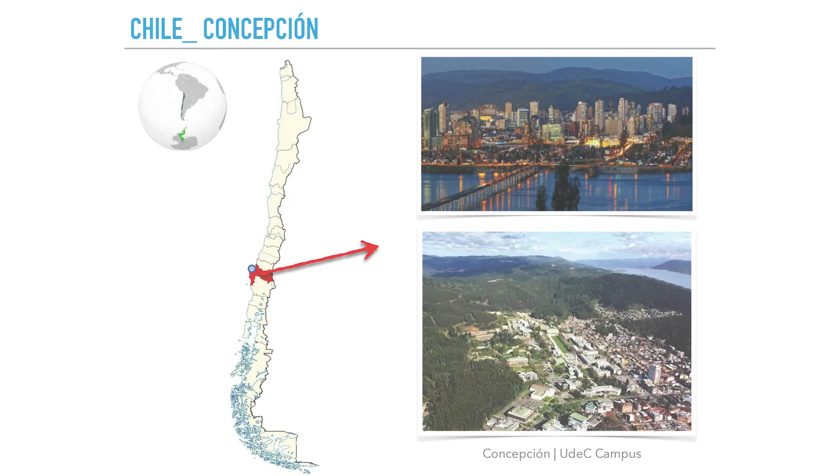And because of that, we are also basically a campus university. What you see here is our university, Universidad de Concepción, which is the only campus that is open to the public, like you would have here in the U.S. In Chile, that is not very common, and our university is actually part of the neighborhood of the city. All the people that live in the city feel part of this university. Some have studied there, some have not, but because it's an open campus, it becomes everyone's backyard, and it became a very popular place during the pandemic.

Just to tell you a little bit about my background, I studied in the same university where I'm teaching. I've been teaching there since 2010. But to give you a reference of how this has shaped me as a designer, we have what we call a faculty in Spanish, which would be like a college here. We integrate 3 different departments: architecture, urban planning or urbanism, and geography. And so we approach multiple scales of problems within the city.

And we try to integrate interdisciplinary collaboration with the geographers, who study not only spatial analysis but also social work, understanding how people interact in the built environment. And then we integrate the architectural component of building design together with urban planning. So this has very much informed my research approach and my design process, in terms of how we integrate all these multiple scales, which are very important if you're approaching sustainability. You cannot isolate a building from the rest of its context. You cannot isolate a city from the rest of its region, and so on. So it's a way of going in and out of these multiple scales.

And I think it's a good way for you to understand what I'm going to show you now with my students' work, just a few projects, so you can see the different approaches that we take. And there might be some similarities with your schoolwork as well. So one project that we did, integrated into a workshop that was part of an international conference, is this vertical studio we designed. We have students from different classes, from 3rd year all the way to 6th year.

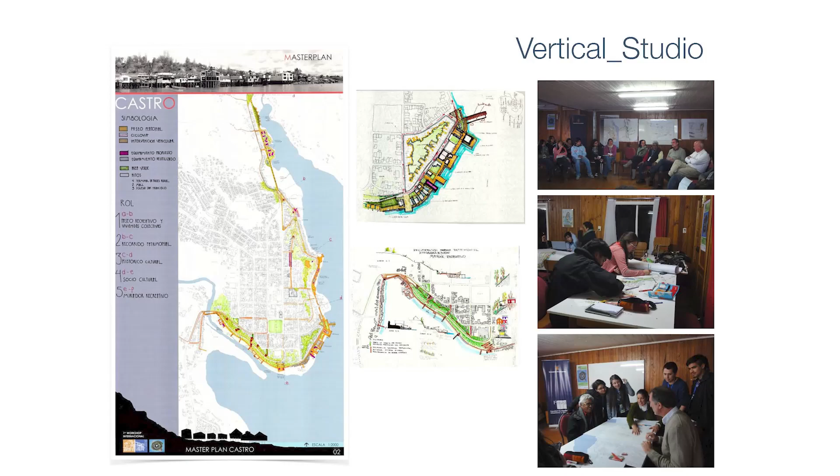And then at the end of the weekend, we developed a whole set of different strategies and site analysis, basically creating images of what different schemes can actually be developed in the future. So this information helped the local planners, the local people that work in the municipality, to inform future projects that they can fund and develop, that normally they don't have the time to do. So I think in that respect, there's a lot of work that our studios address in terms of problem solving for local communities on real problems. So a lot of the input that we develop is on that.

And at the end of that weekend, our students took that information and developed their own individual projects, which is what you see here. So some of them decided to do different centers for arts, some decided on lodging, or different types of programs that they integrated. And then at the end of the studio, they were able to go from a very, very big scale of urban planning, to a small urban design, all the way to an individual project. So they got to see the whole scope and the integration of these multiple scales, which I find very interesting. A lot of times, depending on the studio, you don't get to see that whole range of scales.

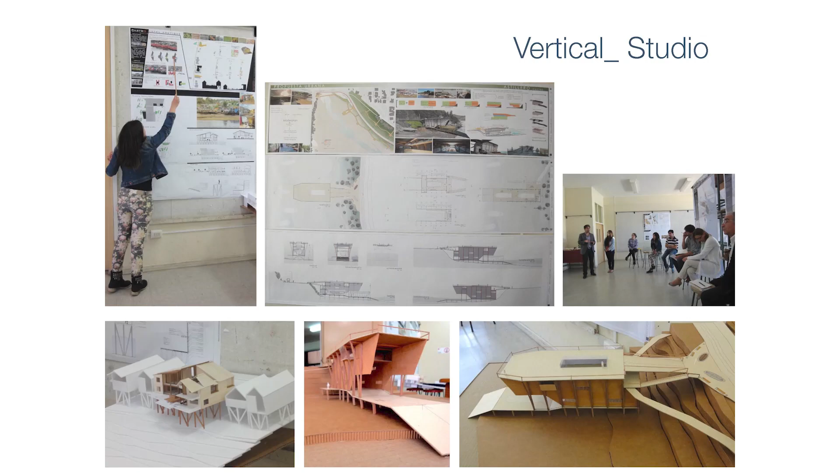Another project that I collaborated and participated in is a solar cluster competition, which was sort of like a design build like you have here. It's a project that was unique in its form. It was the first time that we actually did a national competition across multiple schools of architecture. And it was very new, so students had to develop a whole project. The whole thing was to create some sort of solution for housing. So our students decided to do sort of like a house extension.

A lot of the time, housing happens on the ground level, but there's a lot of need to upgrade that house. So they developed this scheme of, why don't we build something on top, and that house on the second floor can be more the habitable space and can be very efficient housing for people to live in. And so they started to design a lot of passive strategies, and also incorporated active strategies like solar panels. And then they have this whole system of natural ventilation through this shaft, the vertical stairway, and maximizing solar radiation on the north facade. One thing to remember, I'm in the southern hemisphere, so the sun actually moves on the north side, not on the south.

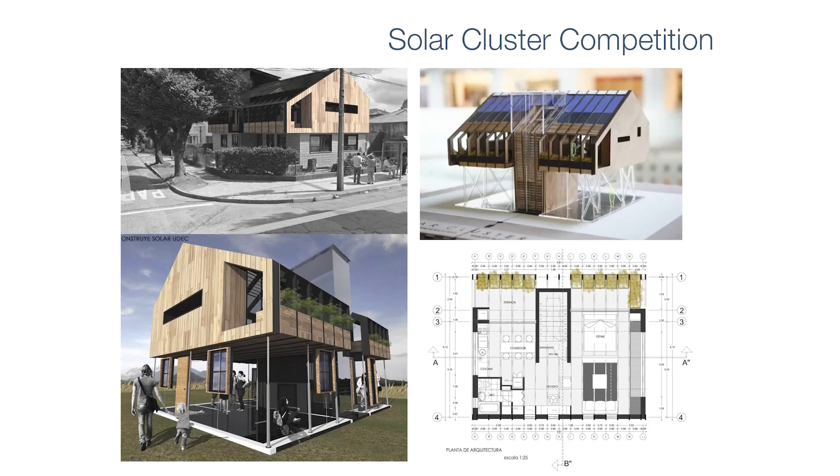So the task that was really hard was that it didn't quite work out like the Solar Decathlon, where they have a whole methodology and a whole infrastructure. This was the first time, so we actually had to raise money for building this, and that was really hard because it's not very common in our country to have public and private companies support this type of building. We had to do testing. They designed this wood frame structure, and it was a prototype where we created this unique module that was added and then created the different sections of the house.

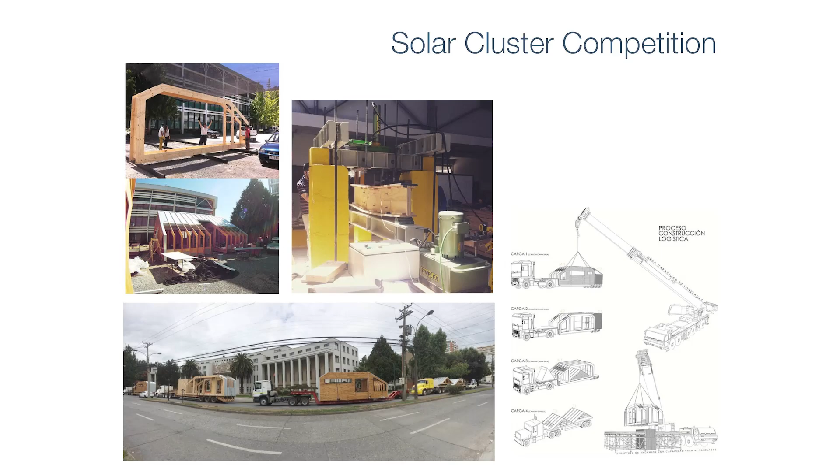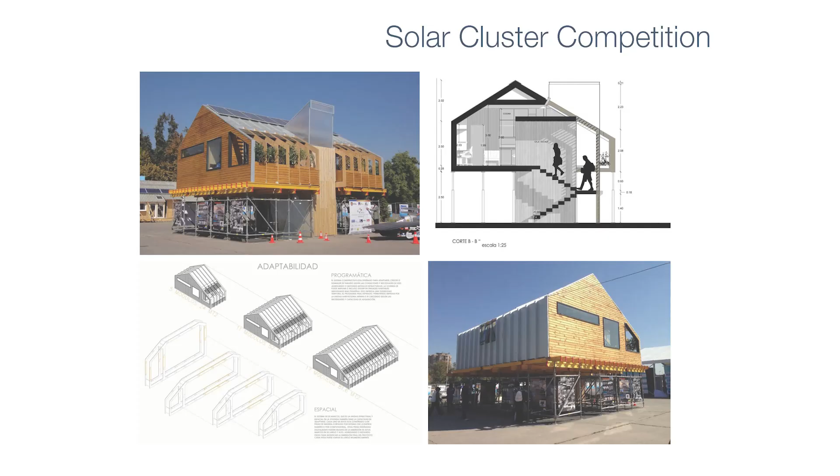And actually, the house right now is part of a research and also student program that they use in the university. So actually, right now, the house itself is part of the campus.

If you get your degree in Chile, you go through a lot of years of undergrad, but then there's a professional year, a year and a half. And in Chile, once you get your professional degree, you're a licensed architect. So you don't have to go through the whole process that you do here. It's the equivalent to a master's in terms of the length of the profession.

But that fifth and sixth year, it's a professional year where you have to develop on your own, and you have to show that you have the knowledge to develop a whole project on your own. So what our students do is that they choose a topic. They have an advisor who guides them and helps them, but at the end of the day, they're on their own. And they develop a project from the beginning to end, all the way through the schematic design, detailing,

and as you see here, you fill up an entire room of blueprints, and you have to do a public defense, like a formality of that. And once you do that, you're granted your license.

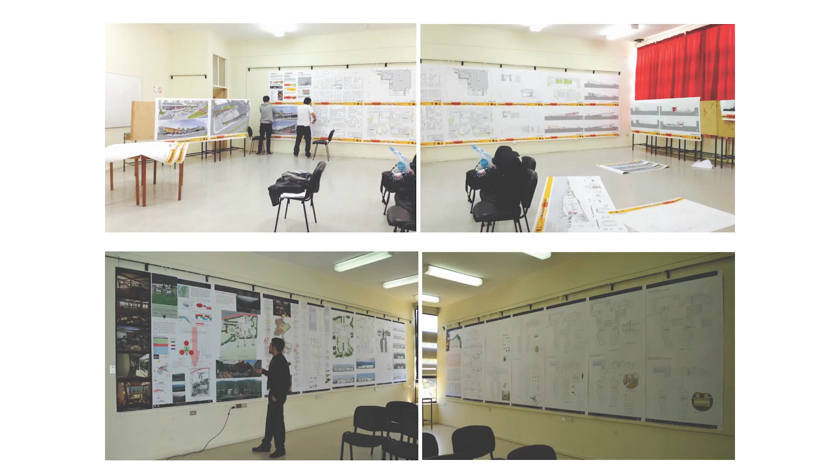This process during the pandemic changed completely because we had to do everything online through Zoom. So that was a whole gamble of how do you see all these amounts of blueprints and plans in just a computer monitor. But it did happen. It did work out, and eventually this is how the process ends. So we don't have a master's. We have master's programs, but the profession itself leads to a professional title.

The significant time that you spend indoors, just the fact that you're here, right? And you've probably been here the whole day, indoors, and you haven't gone out. We just took a little quick walk with Lindsay. But a lot of the times we don't pay attention to that, and especially during the pandemic, right? We were completely indoors, and we became more aware of our indoor conditions.

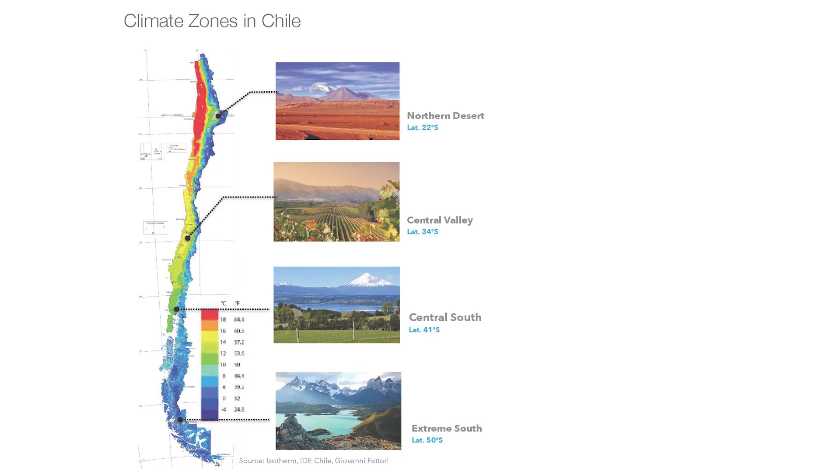So I was asking myself, are classrooms actually responding to this diversity of climate, diversity of temperatures? And because we're a coastal country, how are we actually incorporating that? And to my surprise, we're not. The classroom that you see in the north part versus the south part are the same. And the classrooms that you see here are very boring, not very attractive, right? We've actually stayed away from innovation in terms of providing the best environment for our students.

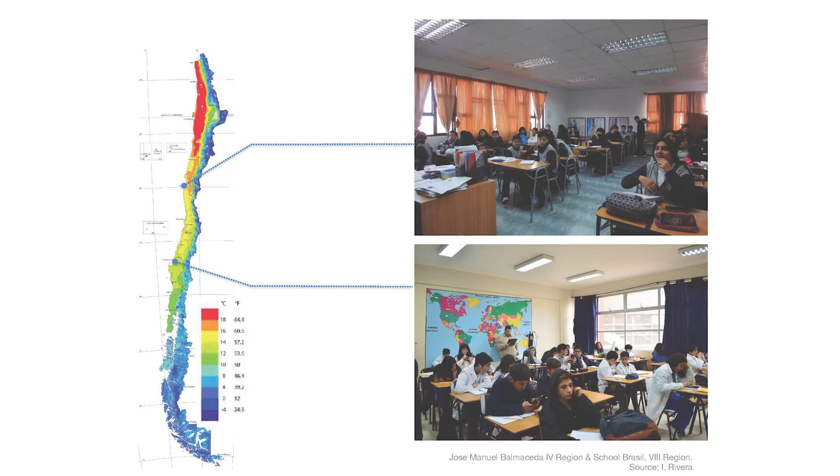Let alone, we have very high density classrooms. We've got about 40 kids in only 50 square meters. So it's very limited space and air volume. And especially now during COVID, this has become a big issue. We also have other problems related to the design, the envelope of the building.

And how are we optimizing that when we have a classroom that is completely packed with active students, right? Active people that are energetic, and they're providing a lot of CO2 particles in the environment. If you're not venting, it's going to happen that you're going to fall asleep.

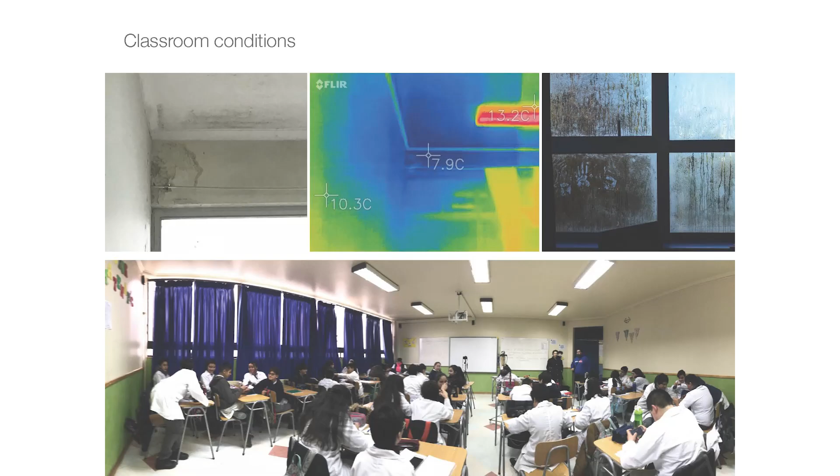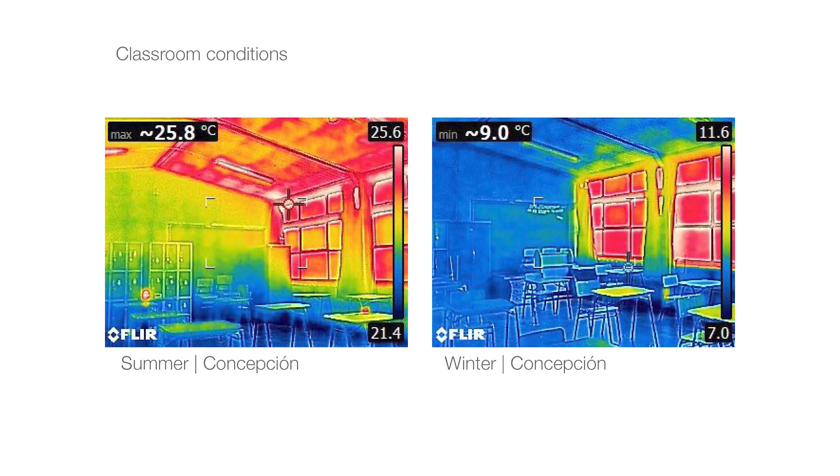And then what is the difference between summer or closer to summer season, right? Because that envelope is so weak and so permeable, we have overheating situations, whereas in the winter we have freezing cold temperatures indoors. So I was asking myself, how is this impacting health?

And when I started to look and study a little bit in the research that I was doing in my PhD, I found out that standards are actually built for adults, built for persons in suits in an office space that don't even move. And then we have kids running around during break times, at least two or three times during the day. They're sweating and they come all active to a classroom that doesn't provide the good temperatures that you need.

So we need to understand the relationship that students have with their environment, and what their expectations are. Because a lot of the time these studies are done for adults, who can answer surveys or are able to express their conditions. A lot of the time those are not done for kids, because how do you do a survey with a kid, right? How are they going to understand those types of questions?

So I was very interested in understanding their perception, and how their socioeconomic status also impacts this perception of their space. So I did a study during my PhD where I wanted to characterize the physical conditions of thermal comfort and indoor quality in classrooms. I also wanted to understand their perception and how it differs from the teachers', because a lot of the time you don't get that dual interaction, and see how they might differ depending on the different seasons.

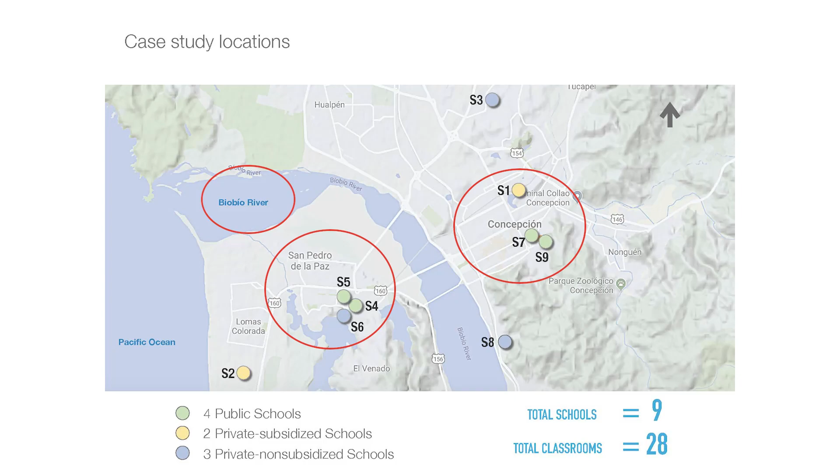This is the river. So I did 9 schools and 28 classrooms, and I evaluated both during the fall term and during the winter term to see the differences. I did surveys in addition to measuring the physical conditions. I got more than 1,600 survey responses during the fall, and about 600 during winter.

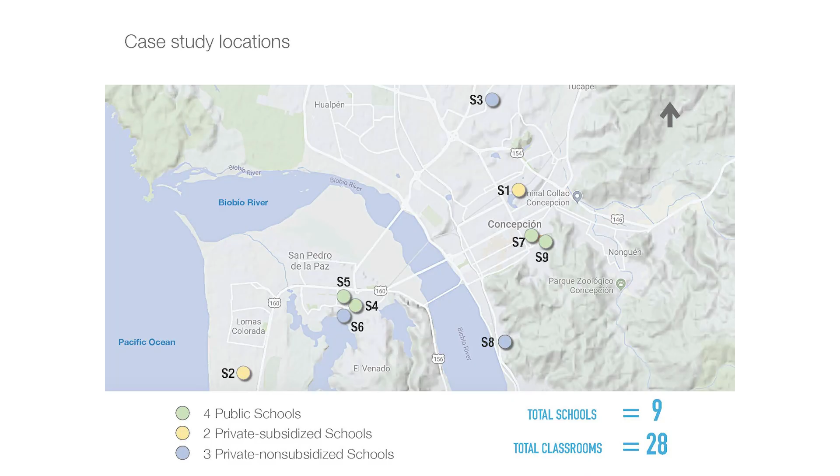There's no heating system. And if there is, it's always turned off because the electricity bill is always high, and a lot of schools cannot pay for it. There's no mechanical system, so you rely completely on opening that window to promote air movement. So I measured physical conditions by installing instruments in the middle of the classroom, trying to mimic the situation of a student in the middle of the classroom.

And while I was doing that, I was asking them questions. How do you feel right now? Would you prefer a different temperature? Would you prefer to be cold? Do you prefer to be warm? And I was collecting that data through tablets, and that actually attracted them, because they wanted to play with the tablets. So that was a bit of an engagement strategy to get them involved in the surveys. And then this is what I found out.

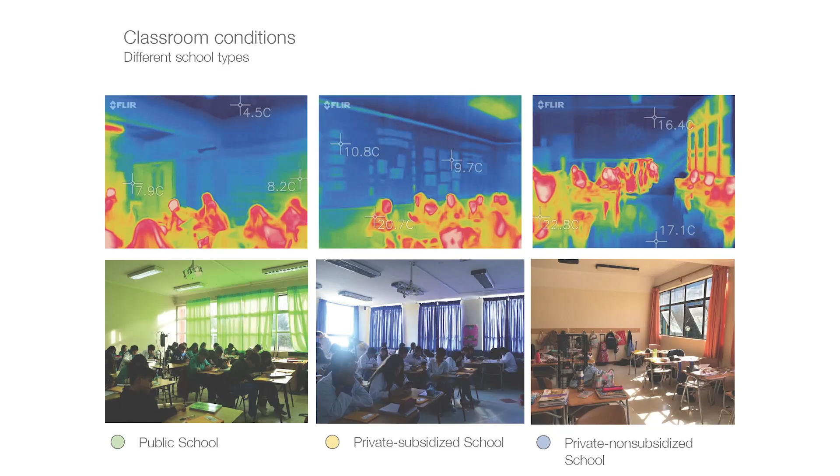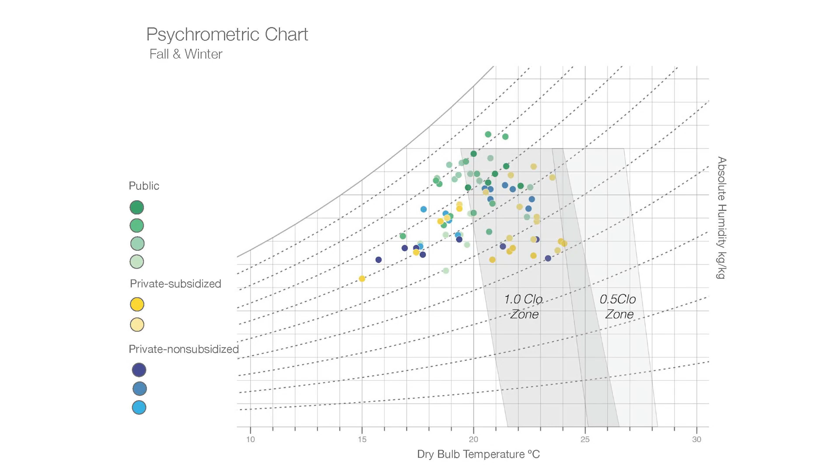What you see here are different colors: green is for public, blue is for private, and then private subsidized. Most of the schools are way up in terms of humidity, especially the public schools, as you see in green. And when I cross that information with standards like ASHRAE, all the temperatures were completely out of the comfort zone established by the American Society of Heating, Refrigerating and Air-Conditioning Engineers.

This is the zone you want to create for comfort if you have a completely outdoor and passive school, but most of the temperatures I measured were completely outside of it.

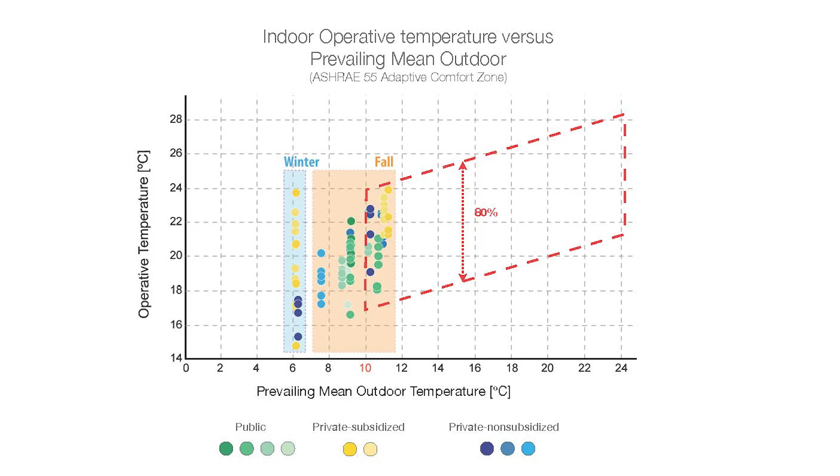So I asked the students, how do you feel? Are you comfortable enough in this space? To my surprise, all said yes. Most of the people—82, 79, 78 percent in winter—were feeling comfortable. I was kind of shocked because I thought maybe they would respond differently.

But it seems like they are taking measures to become adapted to these environments. Even though it's cold, a lot of them were wearing mittens, scarves, jackets. Some of them bring coffee or hot tea. They were trying to mediate those conditions—since the classroom isn't providing a comfortable, well-sealed envelope, they have to do something about it.

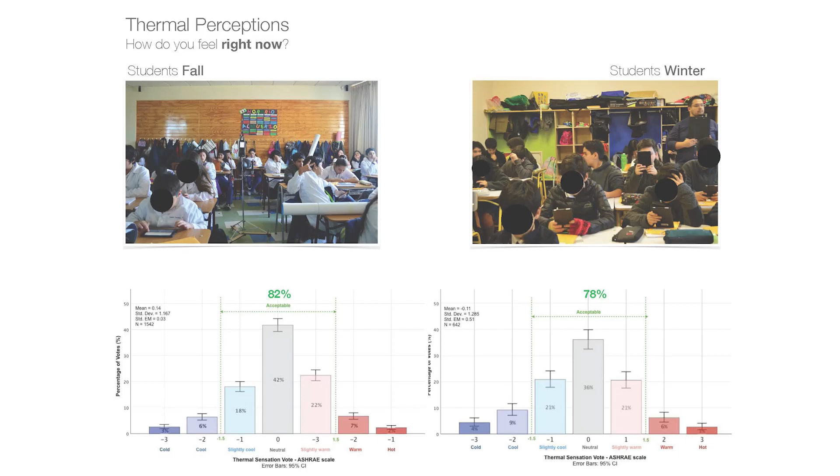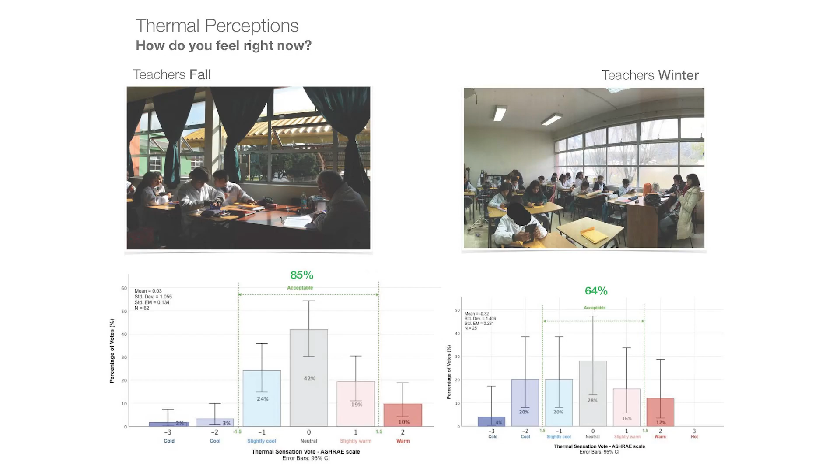Or my parents are going to do something about it so I don't get a cold during winter, right? The same thing happened with the teachers. Even though they were moving from one classroom to the next, they also felt pretty comfortable, or at least not worried about feeling very cold or very warm during the fall. I did ask about air quality, which was a tricky question to evaluate, but a lot of the time they responded that they were feeling comfortable.

Here you can see across the different school types, most responses fall on the center line where they were feeling comfortable. There might be slight differences between one school and the next, but for the most part they were feeling comfortable. That's an opportunity for me to dig a little deeper into how we can compromise between the condition of a classroom and the adaptiveness that professors and teachers have.

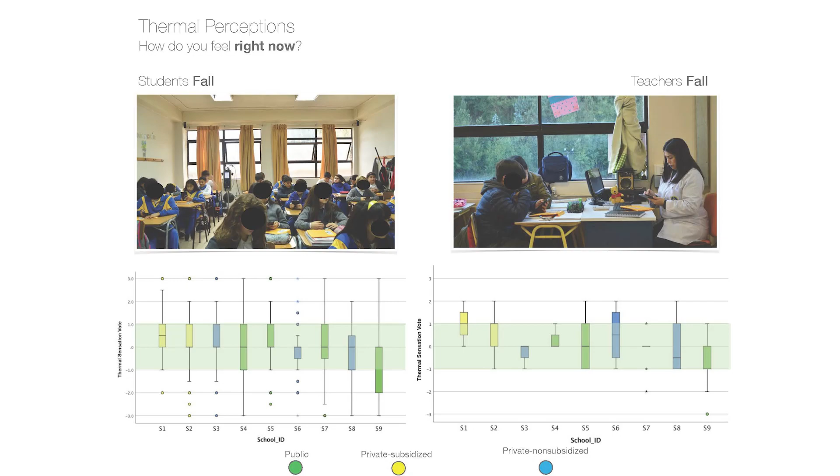But I did find that our indoor environmental qualities are really bad. This is just to show you a graph I made, from pre-COVID, before COVID. I took a long measurement during the morning and afternoon, and what you see in blue are the breaks—we had 3 breaks.

As soon as school starts, we almost reach 5,000 ppm, and the threshold, as you know, is about 1,000 or 1,200 ppm—so we went 4 times that. That's because my sensor reached its max; if I had a sensor that could measure beyond 5,000, it probably would have gone even higher. It's very consistent: as soon as the afternoon starts, it warms up, then you can open more windows, and the value starts to drop down.

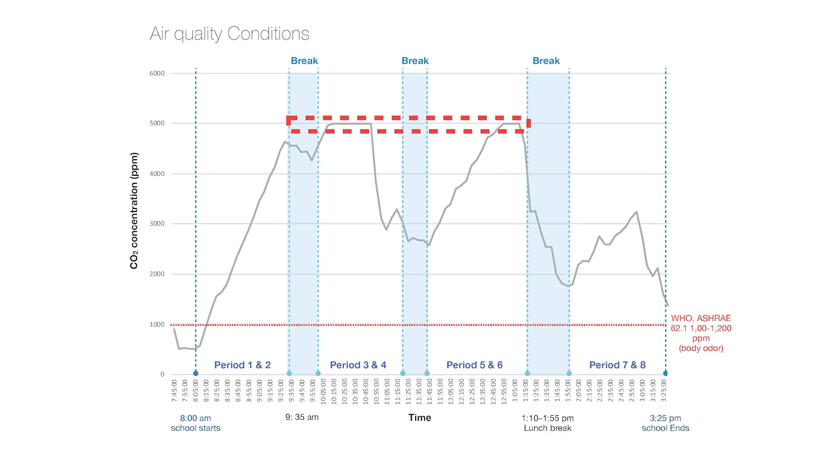But for the most part in the morning, it's an issue, and it's been a very hard issue. The same thing with particulate matter. Because we live in the southern part of Chile, we use a lot of combustion to heat most of our houses. So there's a lot of bad problems with air quality in the winter, especially PM2.5 particles in the air. We also have very high concentration of that during the day, from the morning all the way to afternoon, we couldn't even reach the threshold set by the World Health Organization.

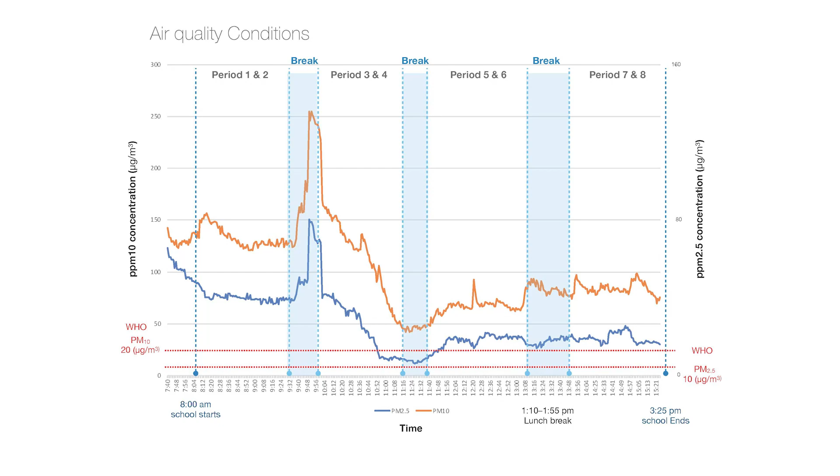So I thought, okay, even though people feel comfortable and even though people are taking measures, we're still not providing good conditions, right? Some people got adjusted, sort of, and tried to mitigate that.

So a few relationships in terms of understanding this, and some conclusions, is that because of the crowdedness, we have to consider how we're going to provide better indoor quality. And because of that, how we're actually making better comfort solutions for public schools as well as private subsidized schools, where I found the most significant difference to be between public and subsidized, which I thought would be private.

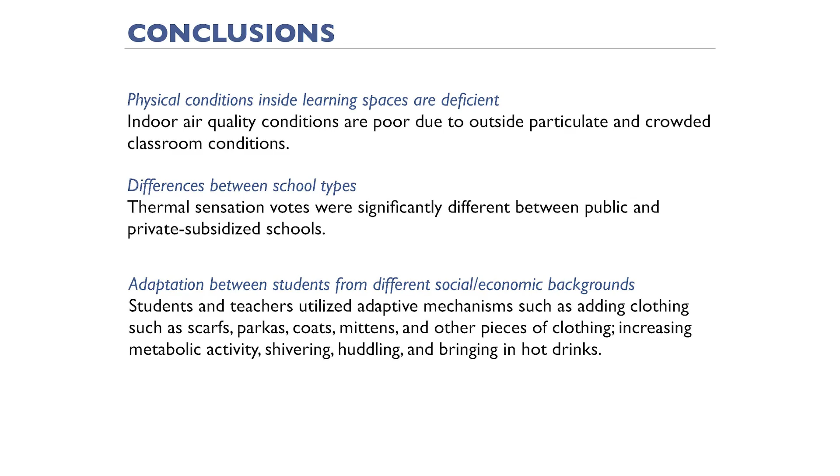And then for the most part, one of the things I did find out is that students and teachers use adaptive mechanisms, like adding clothes or drinking hot coffee, to actually find more comfortable conditions. But that led me to understand, okay, we have bad conditions, we have to figure out a way how this is affecting students.

And that's kind of how everything led - once I finished my PhD, I came back to school, started teaching again, and we built together with another colleague this lab called Vital Signs Lab, whose main focus is to develop conditions and measure those conditions in physical environments.

My friend is also doing a lot of work on trying to retrofit school facilities. So we're trying to integrate both of our research, her specialty in retrofitting, my specialty looking at the inside, and how to promote that.

One project that I wanted to show you, and see how you as students can also be engaged - part of my teaching philosophy is to engage students through this whole process. Not only just learning from theory, but also applied knowledge-based learning, so that your decision making can be applicable through measurements, through qualitative and quantitative analysis.

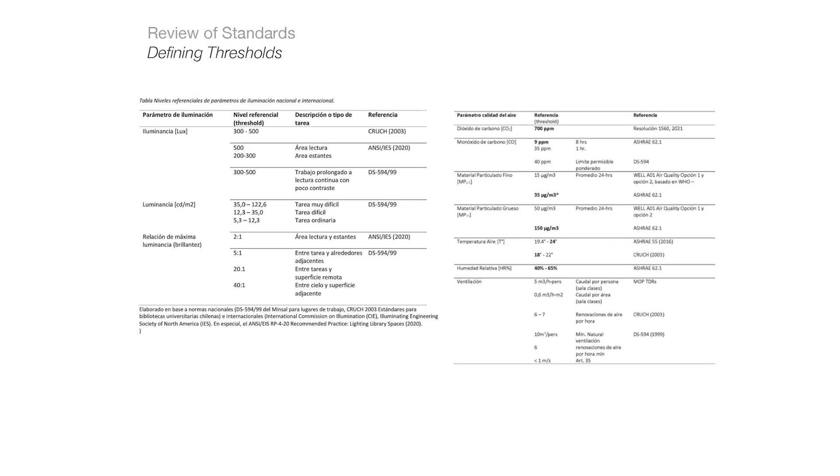And then we went into the multiple libraries. Our students ended up doing a whole body of work in terms of doing a lot of surveys, because a lot of times the libraries didn't even have floor plans, so we had to do all these elevations and floor planning.

And then we start collecting data, like you see here. For example, for daylighting analysis, we actually have to take multiple points in the space and then measure the illuminance distribution. And then in order to analyze that data, we also use another software and analysis like HDR imaging, where we can study in more detail not only the distribution and luminance in the space, but how it affects the visual comfort of the people that work there, their working environment.

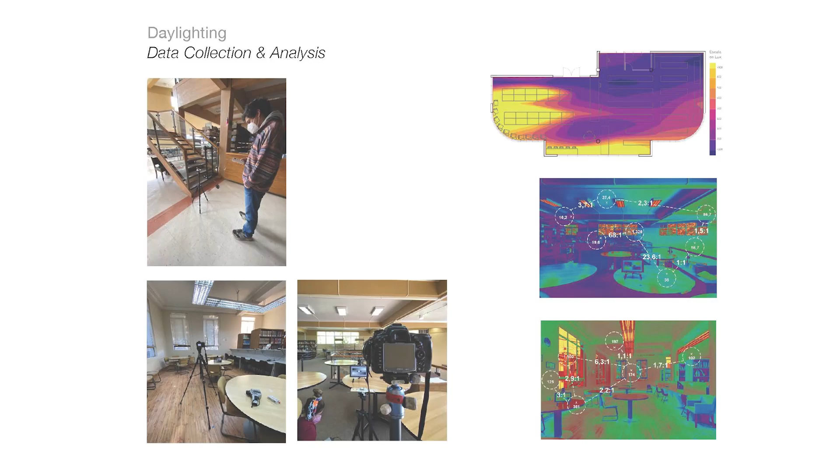So I'm going to show you some quick analysis that we did. We did 3 different iterations for the most part, depending on the libraries. We have one option where the lights were off and the curtains were completely open, just to see what the conditions are if you don't have any lights on, and the natural lighting is providing the maximum illumination in that space. Then we turn on the lights to see the difference, how much you can gain in the space if you turn on the artificial lighting, and then we close the shutters or the curtains depending on the condition of that library, to see how much it's helping out.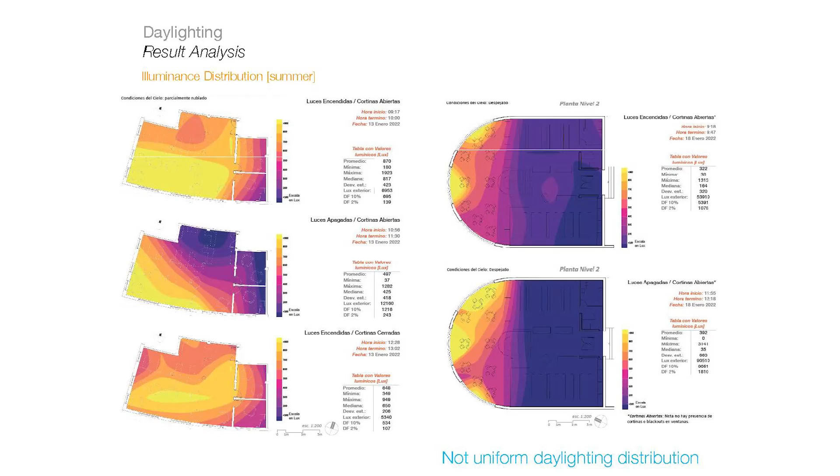For the most part, what we wanted to try is to find a distribution that's very uniform, and it didn't happen. A lot of the areas where people worked were very dark. Even the artificial lighting was not providing enough illuminance to perform well and be more productive with your work. A couple examples.

For example, in this library, the lights were on, no curtains. Then we turn off the lights, we close the shutters, and we see that the light doesn't provide enough illuminance. So even lighting, in terms of what fixtures you select, can actually become almost like an ornament if they're not well designed, if they're not well put. And that also can have an impact on the users of this space.

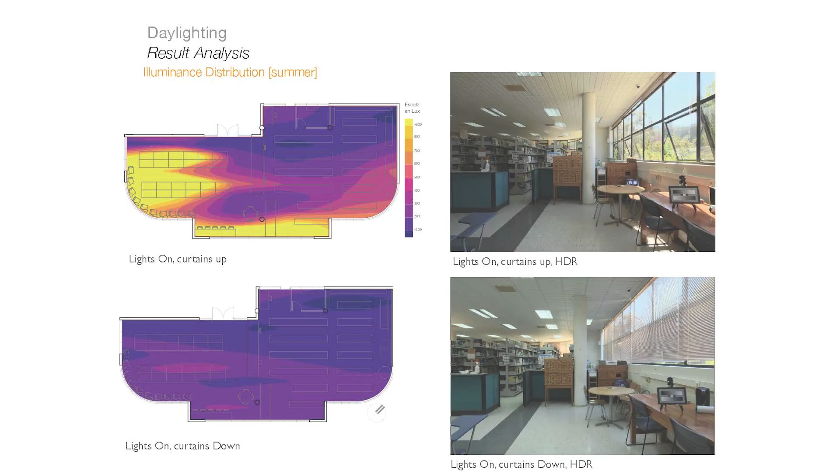This is the analysis that we did, trying to understand that through HDR imaging and false color imaging through computer processing software. And then we can see the impact that can have at the workstation of the librarian. For example, if you have no curtains versus with curtains, the different contrasts and intensity of luminance between looking at a window that doesn't have anything to block out that direct sunlight, your eyes are constantly trying to adjust and change to that condition.

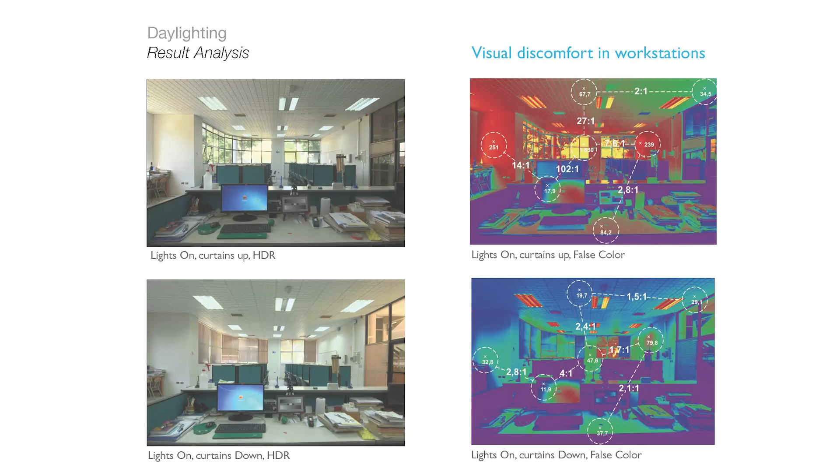Here's another example of what a blackout or a curtain can have in terms of the space, or if you didn't have an overhang or a shading device that can be very useful in these conditions for the facade analysis. If you don't have that, and if you don't have the curtain, you're going to have a big issue where that person cannot even see the screen. Yeah, there's not enough contrast, and you're having a very high glare issue here.

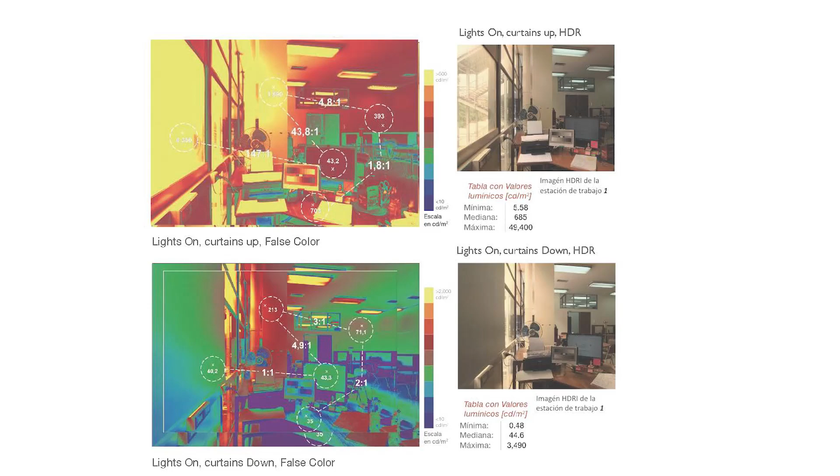And then having this element can provide better illuminance, but it doesn't take into account the thermal conditions, because you're letting a lot of heat go through that envelope because the blackout is not blocking that solar radiation. So it's not the best, but we have to understand a lot of these issues and the problems that we identify.

And finally, some problems that we identify, like some of the shadings, if you don't have any system in the outdoors, how do we mitigate that? How do we provide something that prevents that glare issue, or prevents direct sunlight that can affect all the archives and books inside.

So that's about the research and how it's been working in terms of my teaching experience, teaching students about this analysis of measuring physical conditions in the environment and how you can actually integrate that with your design process. So it's a very hands-on experience of teaching.

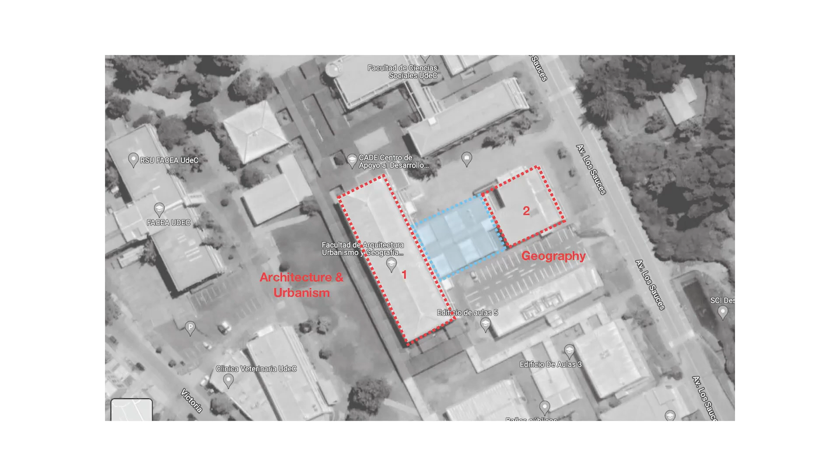And on top of that, we also had to rearrange everything so we don't affect and take away the spaces students have, like laser cutters, plotters, you know all that, right? You don't want to touch that because students will not like that, and we don't want to take that away. So we had to come up with a way that we can actually bridge those two buildings that right now are not bridging very well.

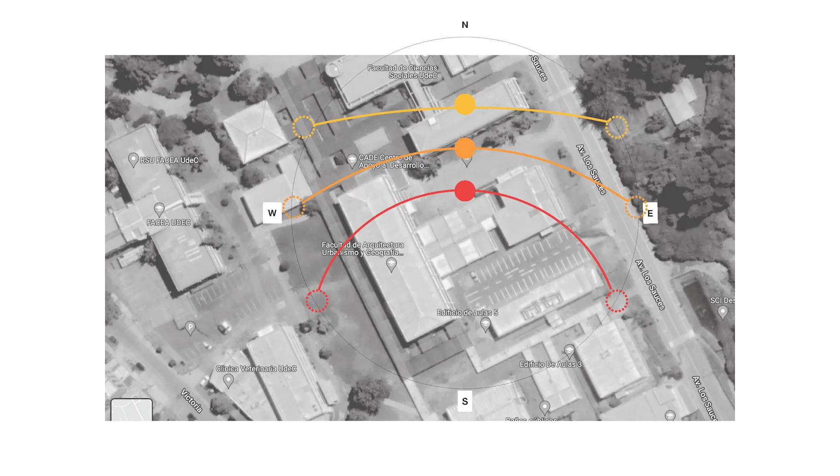Also, we had to figure out how we incorporate lighting. As I told you before, our sun is on the north side, and we're kind of squeezed in this tiny space in between. So we had to figure out how we can maximize that north facade and make a solution that doesn't affect this facade here in a very bad way. We had to do very quickly a study of the program and of the usage of spaces, and how we can rearrange the space that exists on that ground level.

We have 3 different levels, but not all those levels go all the way across in the center space. So we had to figure out right away how many square meters we are working with, what we are taking away, and how we can incorporate that into the design. One of the key components was to try to solve and connect, as you see here, these 2 buildings. And so this centerpiece was very instrumental to create that bridge and connection.

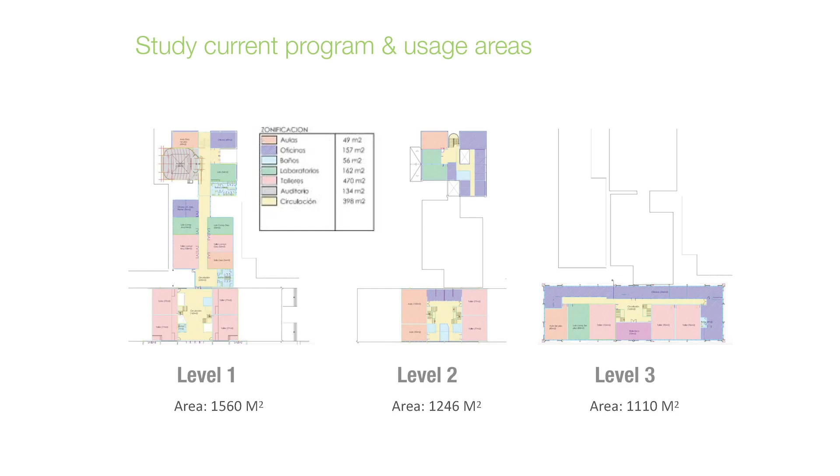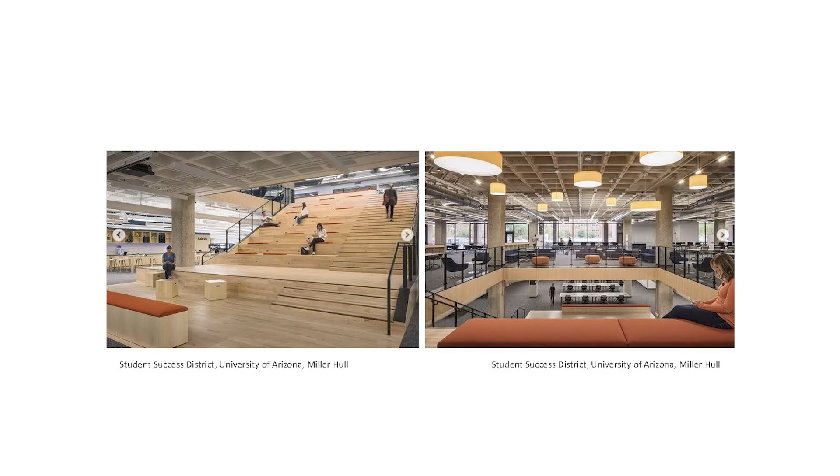And so we said, well, why don't we bring that idea into our proposal, into our project? And we started looking at case studies that can actually have an interior forum, so we can connect those two programs that have been kind of segregated, and we haven't been able to interact much with the architecture and the geography. So we looked at references like Miller Hull at the University of Arizona. We like this composition of integrating this internal forum where people can gather, can meet, can even have lunch.

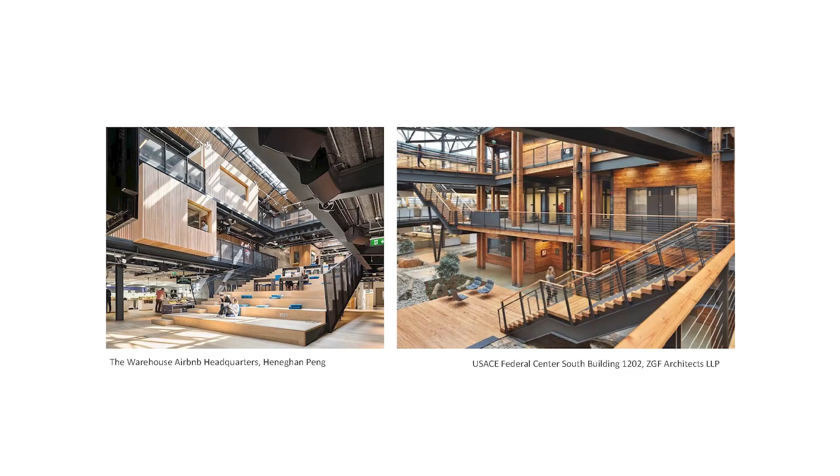The quality of the space, the materiality, for example, like ZGF have done here in the Federal Center South building, or a warehouse. We like the materiality of wood and the warmth that it provides with having a little bit more of an industrial look. And then also how students nowadays meet and how people interact in new educational spaces that can enhance the learning activities. You don't necessarily have to be in a classroom to interact. You can actually be in a corner or in a space that has good lighting, access to views, which is really important, and that can be an important element for your design.

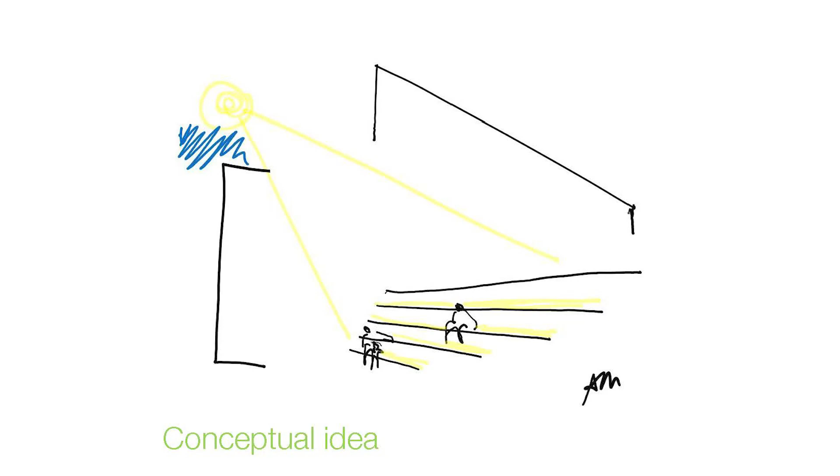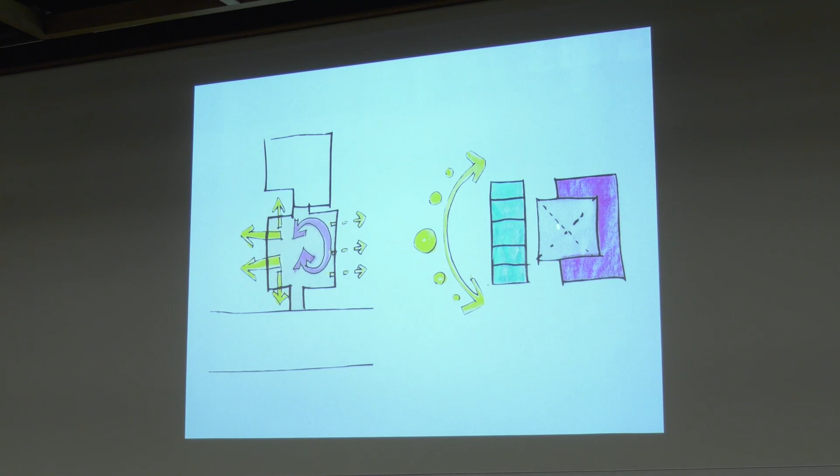So we designed this with this conceptual idea of having this forum, having this connection, bringing a lot of daylight inside the space to try to create an openness. Even though our buildings are very tight and sort of have this claustrophobic image, we're trying to do the inverse. So we tried to lay it out in a way that we can maximize this. So we open the north facade. We shortened the facade on the south a little bit more for energy performance. And then we created this sort of center where people can meet.

I'm going to show you briefly some floor plans. So we have the access to geography here. We have the access to architecture. One of the requirements this building needed to have, because it's focused mostly on research and graduate level, is that in our school we get lockdowns. When there's protests, everything gets locked down, and professors cannot access their labs. I know that's kind of unique because probably here it doesn't happen, but our professors asked us to make the building work so when there's lockdowns, they can actually get to their labs and still do research. So we had to figure out ways to give professors access to those points during lockdowns or protest manifestations.

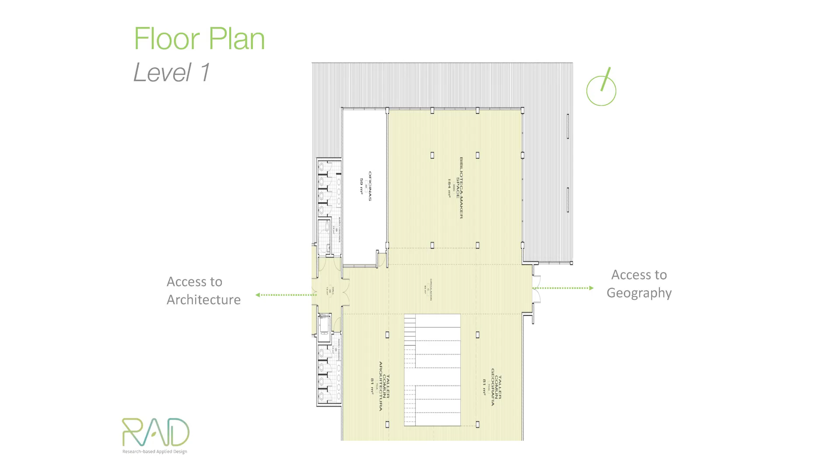So we built the ground level completely open. We have open studios on both sides, our main forum at the center, some areas for kitchenettes where people can meet, and then a library maker space that is connected to a terrace on the north side. Then on the second level, we resolve basically the main need of the program, which is all these labs. We distribute all the labs with the same area facing north, and they have some spaces where they can meet with their colleagues or their students. Then we have areas for students, lab computers that can be connected along here. And in this section, which is a little bit cut off, we have a gallery space where people and students can exhibit their work, which we don't have currently.

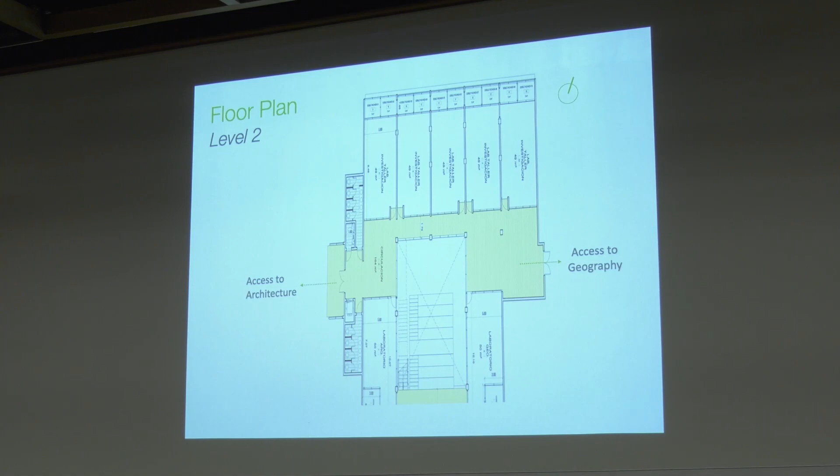And then we said, well, why don't we do a third level? I know it's more than the budget the university can ask for, but if we don't get the chance now, at least let's present it and see. Because we also need to find a way to integrate the graduate level, the master's students and the new incoming PhD students.

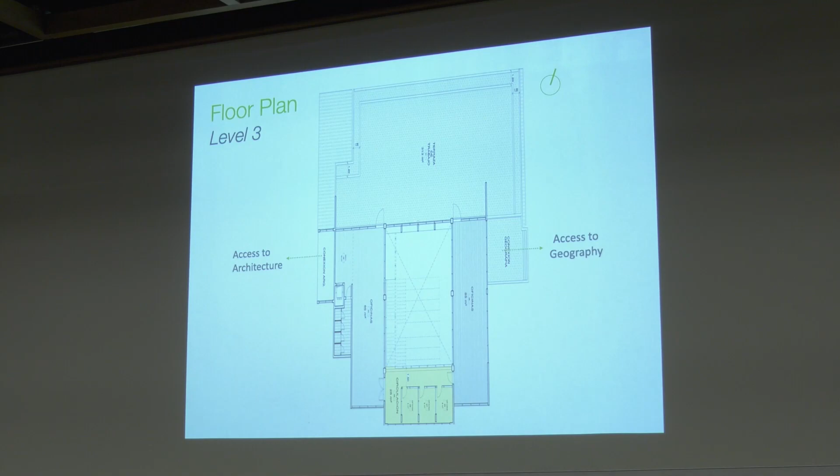And then we had this big clerestory facade that is the main attracting space where we actually bring all that light in. So the idea is to naturally illuminate this whole space. On the north facade, we have some system of controlling that lighting through louvers, horizontal louvers.

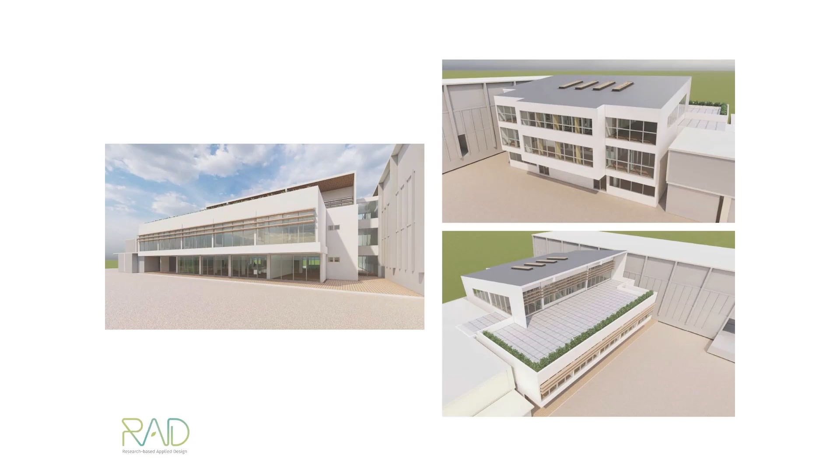And then at the ground level, we have all these makerspace studios that can open up and can actually use that terrace. And in the back, we have classroom spaces and then this gallery that projects into the parking lot of public space. And these are some interior images of that space. So it's like a 3-level open space where students can meet. And then we have the labs accessing here in the second level for all the research, a gallery space, and then the graduate level up above.

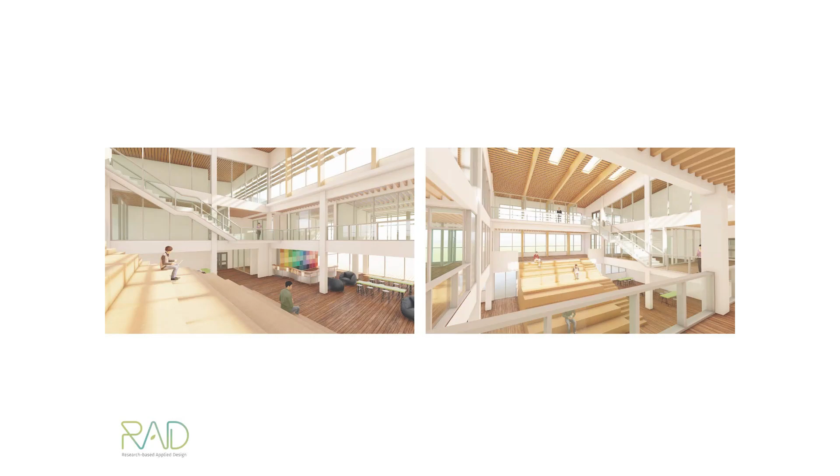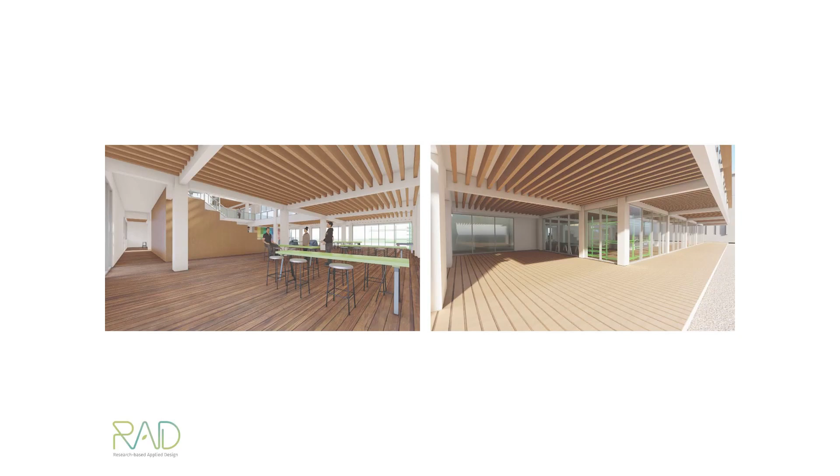So you have this notion of always being aware of what's happening, something that we kind of don't have right now, and also creating openness, open floor plans that can connect, like you have here in Clemson, and I really appreciate it: you open studios so you can see what the students are doing from other studios, and you can interact, because having that openness also provides that interaction with professors, with your classmates, whoever is interacting.

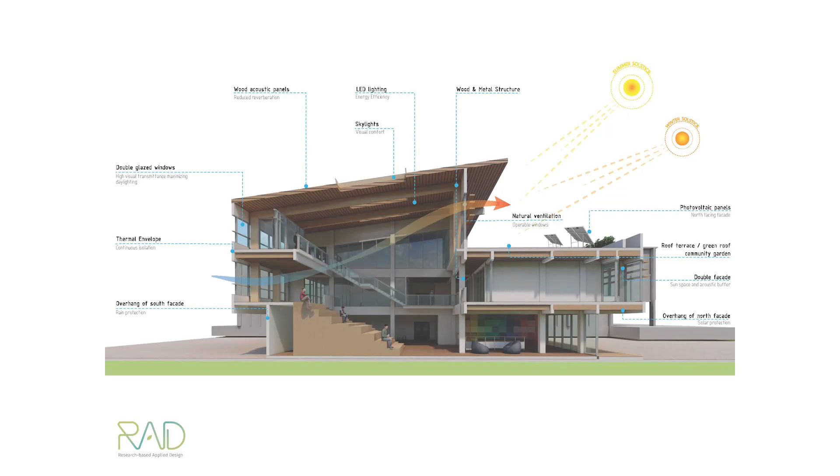And these are the final images looking out to that third-level terrace space area. And this is just to summarize some of the passive strategies that we incorporated in the terrace, some active strategies of solar panels. And we also created some space for providing shade during the summer, maximizing that daylight during winter, and providing protection to that south-facing facade where we get a lot of the rain and wind.

And then the last project that I wanted to show you is a little bit different. It's a native observatory. It's actually an astronomical observatory, but not professional. It's actually for tourism. So this was actually one of our first projects. And we thought, OK, fine, we're going to do this probably in a month. We were so wrong. This project actually took a whole year, because it was so technical, even though it was only 1,000 square feet approximately. It was a project that really made us think a lot about the technicality of how to make this work.

So a client that owns this land in the south part of Chile, I'll show you a plan, has a restaurant. And now he upgraded into having a lodge. And he said, I need to have some sort of attraction point as well. The nights here are beautiful. You can see the Milky Way, mostly during summer. I wanted to have that connection with the stars. And so he came, and we connected. And then he said, I have this site to build that observatory.

So we were working with a building that we're not going to use, but at least the site is there. There's a slight slope, but we also have hills, like you see here. And this particular location is about 4 hours away from Concepcion in a town called Malalcahuello. It's in a different region. Here is the borderline between Argentina and Chile. So a lot of the mountain attraction points are along this area. Hot springs; if you want to get out of the city, this is where you come.

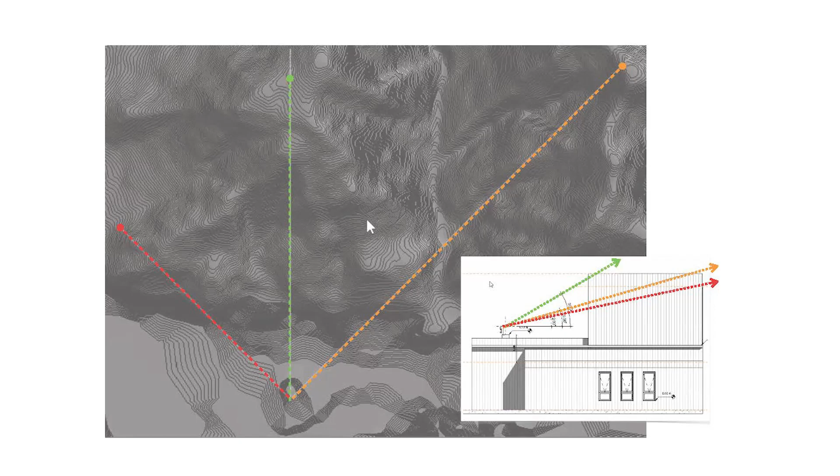If we have different spheres or domes, so to speak. So we have to come up with a solution that was very simple. So we iterated many times trying to figure it out. We actually put the telescope on the second level, as I'm going to explain here, because that way we can actually optimize the viewpoint.

So when we laid it out, we decided to use a little bit of some native architecture. The natives from the location are Mapuches, indigenous people that really appreciate the stars. And they have a whole conceptual idea of how to lay out and relate with the landscape, relate with the land. And there's a whole sort of grounded heritage that we wanted to also put into this project.

We have to have a small lecture room in the ground level, a kitchenette and a bathroom. And so the ground level is all ADA accessible. Sadly, we were not able to do that on the second level, but since we have this decking and observation, we were able to provide observation for that.

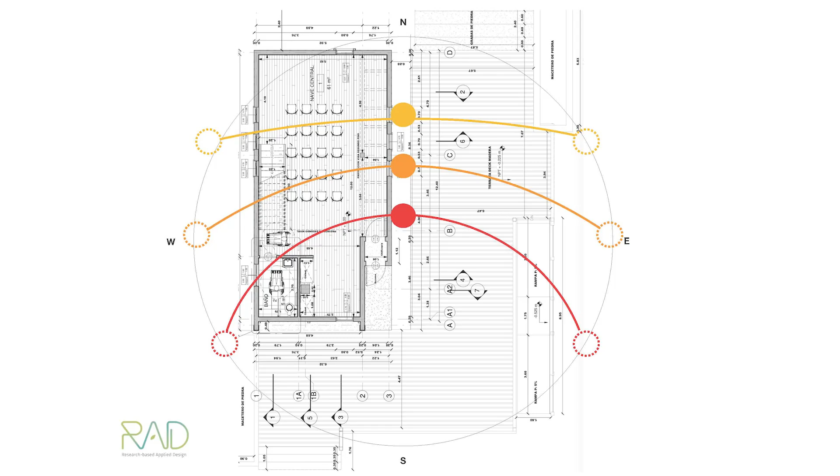And so as I was explaining, we maximize the lighting. We have to also close this building during the nighttime as much as we could. So we open a lot of the east facade, a little bit on the north, and then some windows in the west and south. The complex element was actually to figure out ways that we can move this. So in terms of the design process, we have to figure out ways that we can move it.

So we decided to have a retractable facade that moves the roof, and then also a vertical facade that moves vertically because of the constraints of how much openness you need so the telescope can have the whole sky dome available. We created a ramp access so people can, at least on the ground level, have access to that floor, and then provided shelter on the south facade at the main entrance of the observatory.

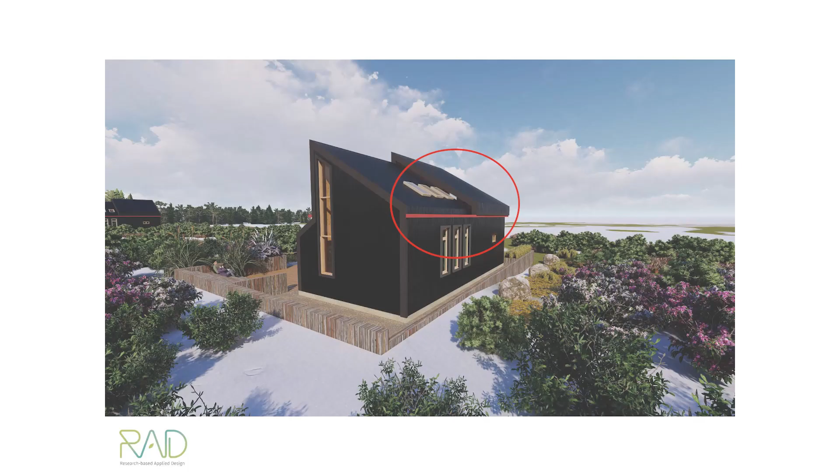And here you can see a little bit of this retractable roof. So we have all this roof that kind of slides down and opens up to the back. So you have the main south facade completely open. And one of the things that I didn't mention, the best things to see at night are actually to the south, because you have the two Magellanic Clouds and the main objects to see facing south. So that also was why we oriented the main openness of the observatory on that side, as you see here.

One of the tricky elements was also the pillar. The pillar had to have a foundation of 2 meters by 2 meters and completely isolated. And we were like, but this is a tiny telescope. Nope, we have to have that because any element that can induce any vibration to the telescope can really make a mess in terms of the observation. This is not an astronomical research observatory, but it still needed to have a completely isolated pillar.

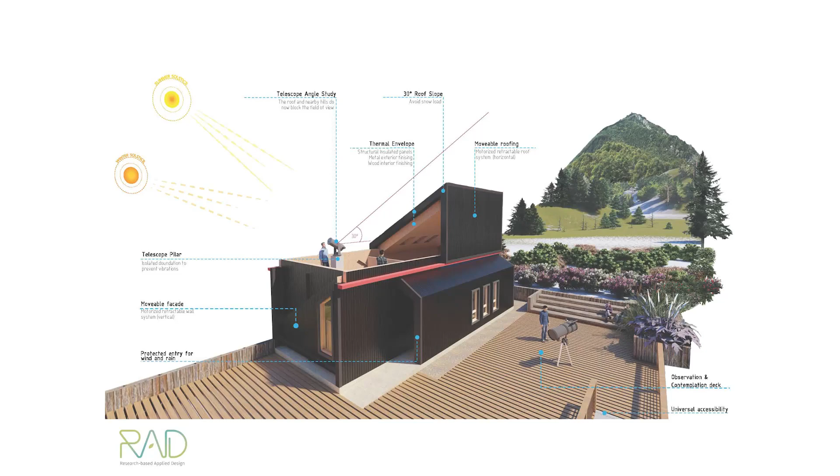So we have a pillar that is more than 4 meters high with a foundation that is 2 by 2. So it's crazy. And so those constraints in terms of figuring out how the roof moves, how we open that hole, and then how we maintain the angles was one of the bigger challenges that we integrated. And this is what you see in this summary image of integrating the daylighting access together with all the efficiency.

Because here it snows, we have to have a very steep slope of roof, more than 30 degrees. It snows about 3 feet, so about a meter or a little more than a meter. So in order not to create extra weight on the building, we had to have a very steep roof. That's why the inclination here.

And also the envelope. We wanted to have a very high-performance envelope. So we use SIP panels with a lot of insulation, so the building doesn't create any condensation, because that is also going to affect it when you open up this building when you're trying to observe.

So like I explained before, we have the public lecture at the ground level. We can open these windows and we have access to the terrace. And then we have a small kitchenette; for example, when they do night observation, a lot of the times you have to have coffee for the people to warm up. And an ADA accessible bathroom. And then on the second part, we have the observation deck, where the telescope is. And this looks down into the ground level.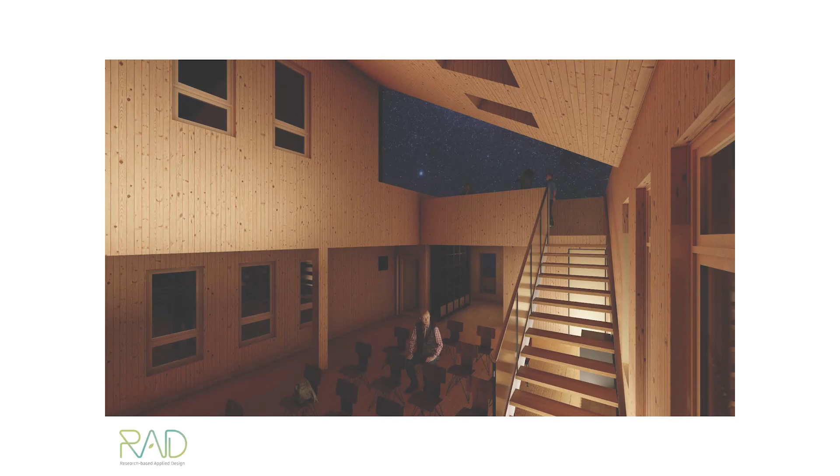And that's my last project that I want to show, but to summarize, I tried to give you a whole scope of how you can include research to inform your design decisions, and how you can also provide knowledge in that architecture can actually become very technical and very scientific if you decide to go into that realm. I was not expecting to go into that realm of research. I thought once I finished my master's, I'd be done and I would practice, but life had a different route for me. But I found that it's interesting to integrate both professionally as well as academically.